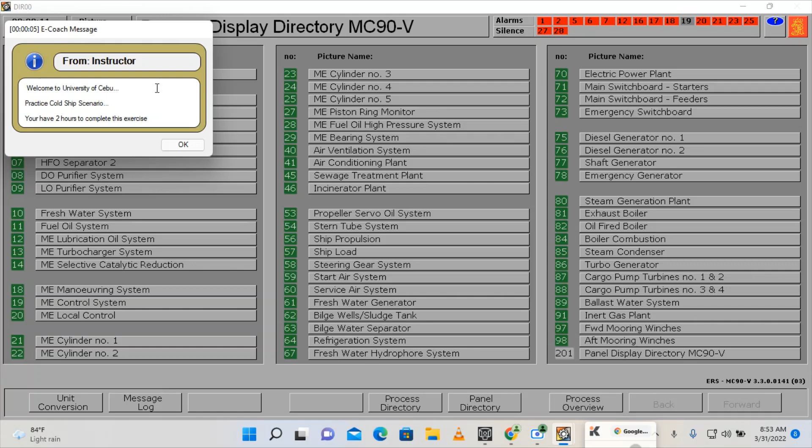Press Shift F1. Now it's running. Welcome to University of Cebu. Practice cold ship scenario. You have 2 hours to complete this exercise. So by the way guys, we have here an alarm, so just acknowledge.

Let's go to the emergency generator first. Make sure that we have enough hydraulic pressure here. This is enough. So our emergency generator is now ready to start.

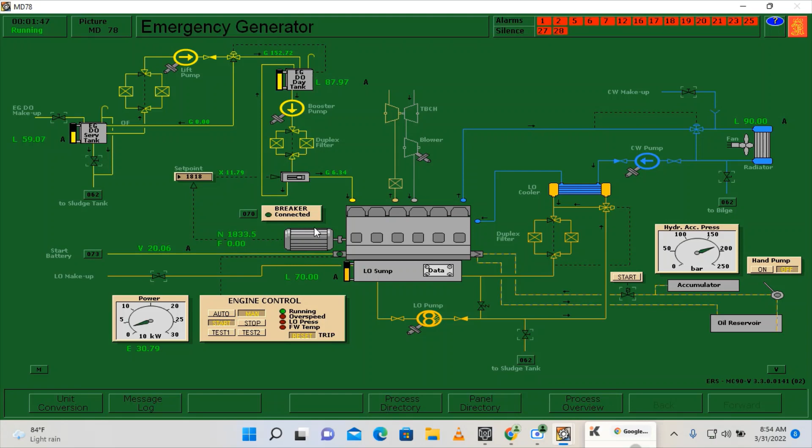Now it's running. Voltage control on, put it in auto. Let's wait until this one will connect. Now connected to the emergency bus bar. Let's put every equipment on the emergency switchboard in.

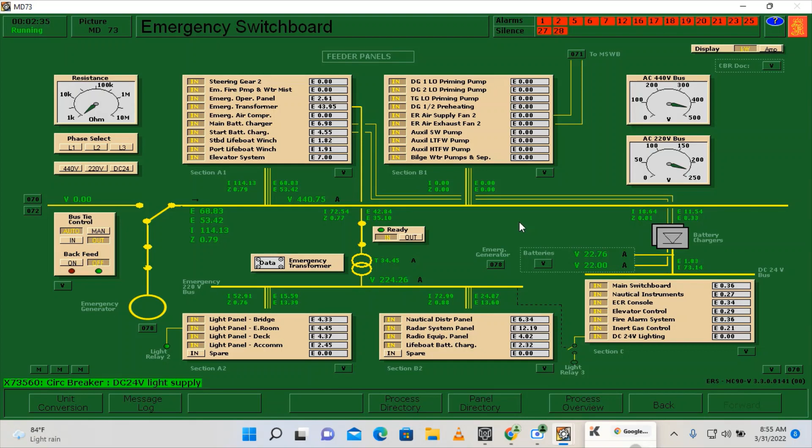So later on we are going to start generator number 1 and 2. So let's prepare as well the main switchboard. Switch all the equipment in.

We're done here. Let's prepare DG1 and DG2. I'll start it afterwards. We can open as well here the steam and all the related valves. So we're going to use diesel oil for the starting of DG1 and DG2.

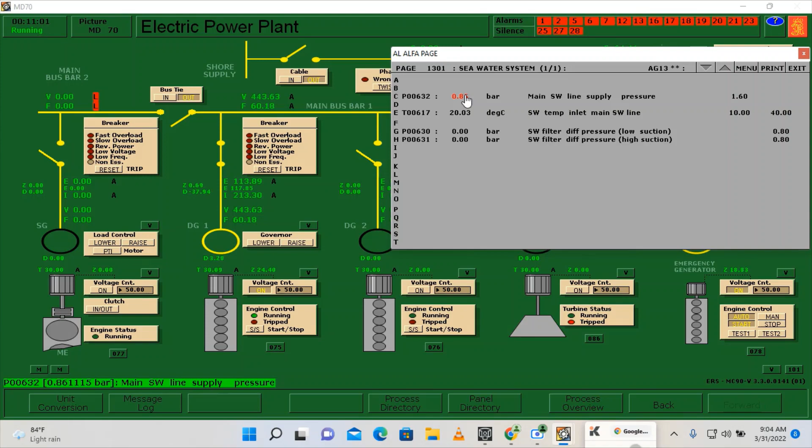Seawater system. Go. Low pressure, start main seawater pump and put it in remote.

Okay. DG2, let's start.

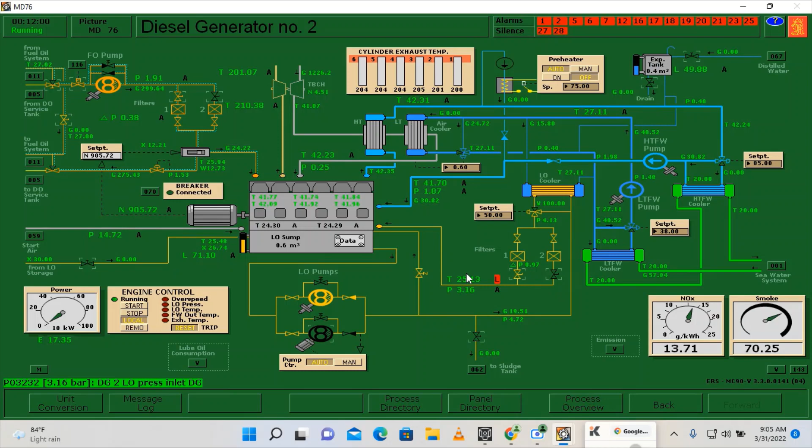HT of DG2, this one will be normalized. Same for this lube oil temperature, this will be normalized later on since it is already running. Put in remote.

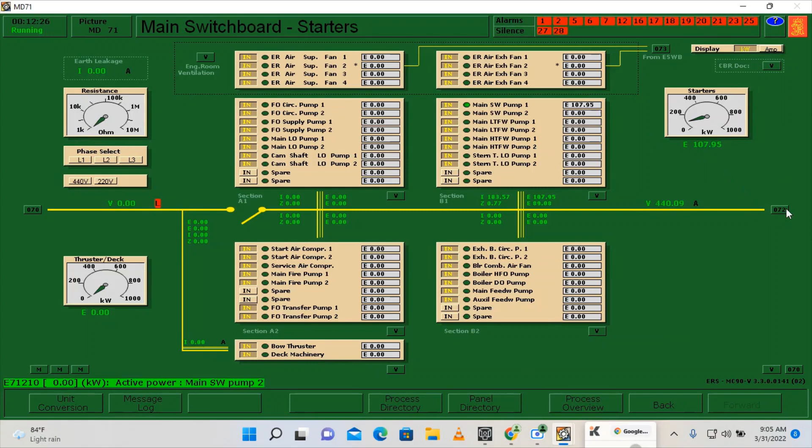DG2 connected. Make sure this one is in. Okay. Just acknowledge, this one is related to the main engine.

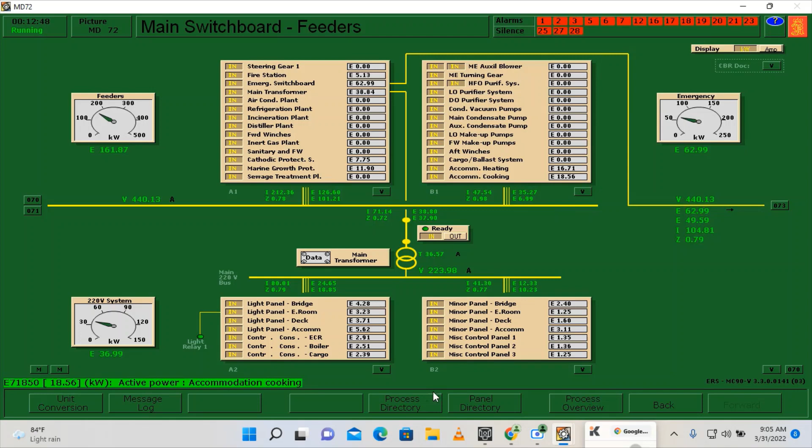DG1 and DG2 is now running. This will be normalized later. Acknowledge.

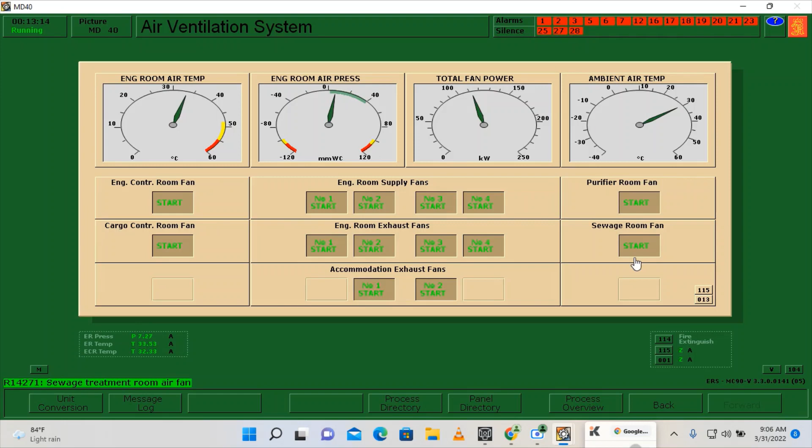We need to make sure that our fans are running. Switch it on.

Now let's set up our starting air system. So I only open starting air bottle number 1. We will make starting air bottle number 2 as a reserve, so I'm just keeping it closed.

Top it up. Let's double check the lines. Okay.

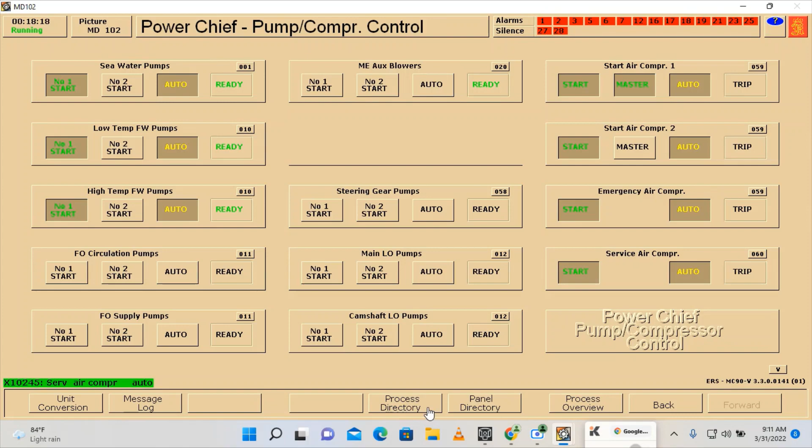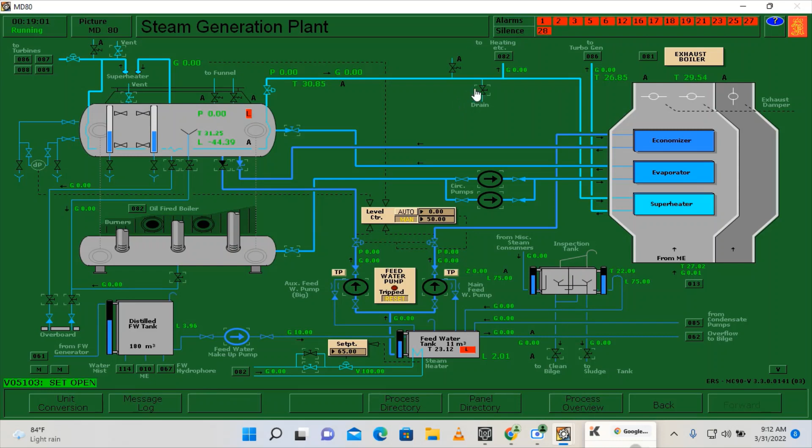Let's proceed to the boiler. Set up the valves. Page down. Zero. Auto.

So we have already opened the diesel oil from our tank going to the boiler. So we can start our diesel oil pump. As you can see, our boiler is still not running, but this one is having a relief valve, so it will just go back to its system. You can run it.

So we still don't have steam, we cannot use this one. We need to use atomizing air since we have already air. So just change over. You can open this one as well, and we can set up this steam heating going to our HFO. Switch it on DO. Make sure there's no active alarms here.

So a while ago it was at low atomizing pressure, but now we have already enough, 5 bars. 7, 10, 10, red. So let's do a purging process on our boiler.

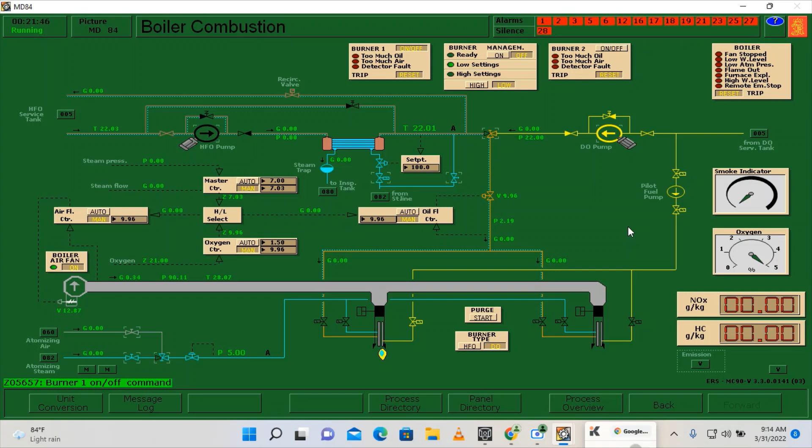Purging is now finished. Put it back to 10, and let's start our burner number 1. Burner number 1 is now firing, so we can put it on automatic.

We can start as well burner number 2, so that we can heat up faster our water on our boiler. Better to use 2.

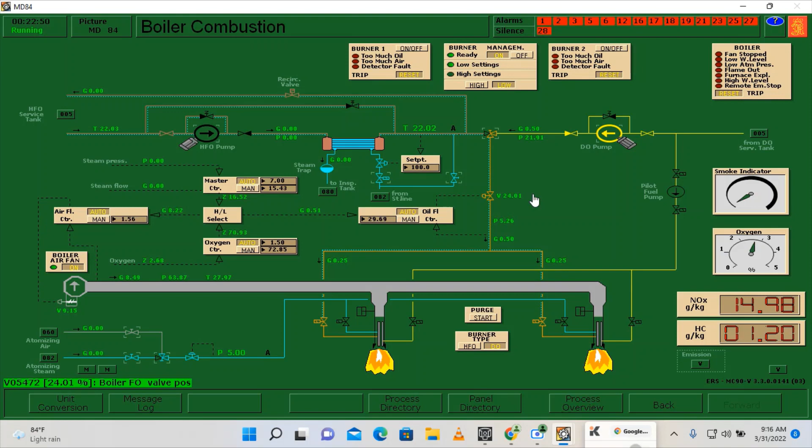Once ready, you can put the burner management on. This will automatically control the burners depending on the steam pressure. Go here on the oil-fired boiler. Let's warm it up a little bit.

Let's close the vent.

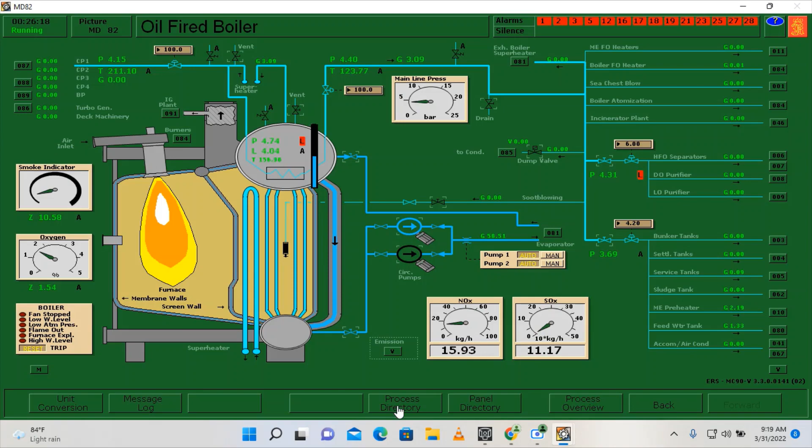Let's slowly open this steam shutoff valve. It's now fully open. So run this feed water pump.

Once this level is indicating 0, we should be able to put 0 also here. Okay, 0, and put it on automatic. So you can close this one. By the way, we already have enough pressure here, so we're all good.

I'm going to make sure that the steam going to our bunker tanks is open, so I'm going to make it 100% open. Okay, page down, settling tanks. Open.

By the way, in order to heat up faster our HFO settling tank, what we can do is run our purifier feed pump. Just open this one.

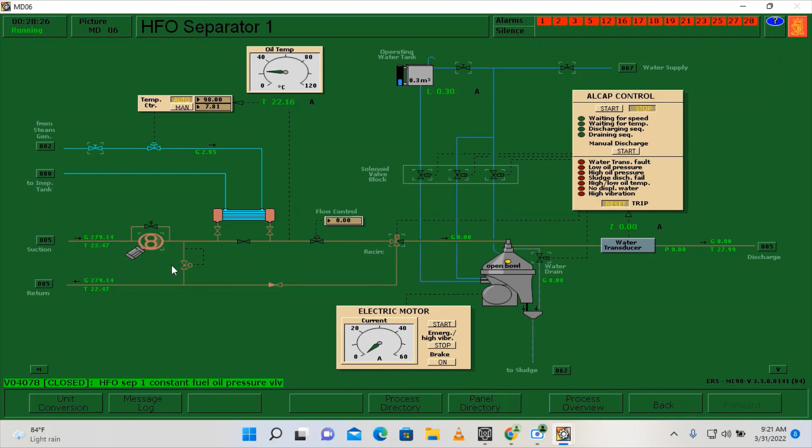Maybe going here. Here, where's here? Open the steam, put it in automatic, and start your feed pump. This one is for the HFO separator, but I'm doing this in order to heat up faster our settling tanks. It will just do a recirculation.

Service tanks, we have already opened this one a while ago. Now let's proceed here on the refrigeration system.

Make sure that there are no active alarms here, then start. So you can see I've started it at 10. I'm manually adjusting this; later on I will increase this one gradually.

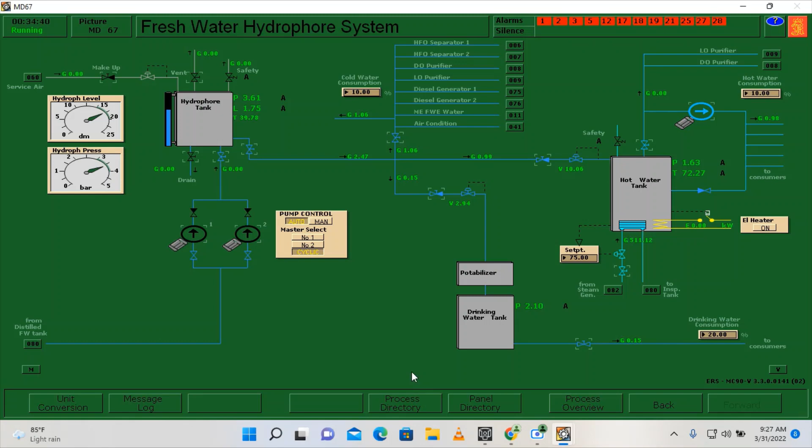The next thing that we need to do is prepare for our departure. So we need to check first here on the stern tube. We have low level alarms, so we need to top it up.

Let's start here on the high... this is enough, change it over.

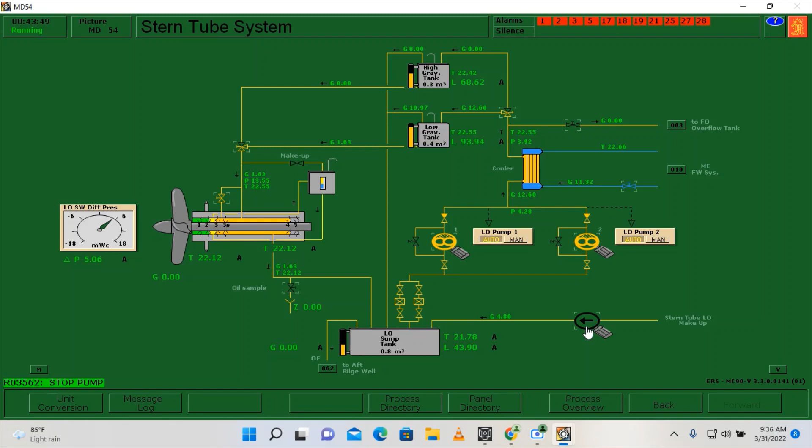Okay, so this one should be enough. We're going to top up if there will be an alarm. I'm going to stop, and let's proceed here on the steering gear system.

The steering gear system, we also have low level alarms here. So open it, top it up.

I'm going to run first this pump number 1. So what we are going to do is we need to check steering gear pump number 1 and steering gear pump number 2 for both hard port and hard starboard. This is already a preparation for the departure.

By the way, if you haven't seen the previous video, please watch it as well. That one was the preparation of the main engine for departure. It's almost the same process, or you can watch that one.

This is enough. Put it local, run it, and we need to check hard port, hard starboard.

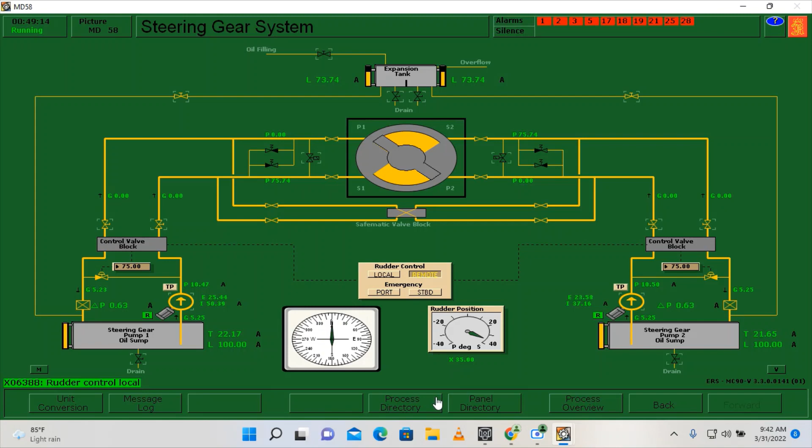Okay, we're all good here, and we need to prepare our main engine systems. We have already prepared this freshwater system. Page down, line up the valves for the fuel. So this one is diesel oil. I will not use steam heating.

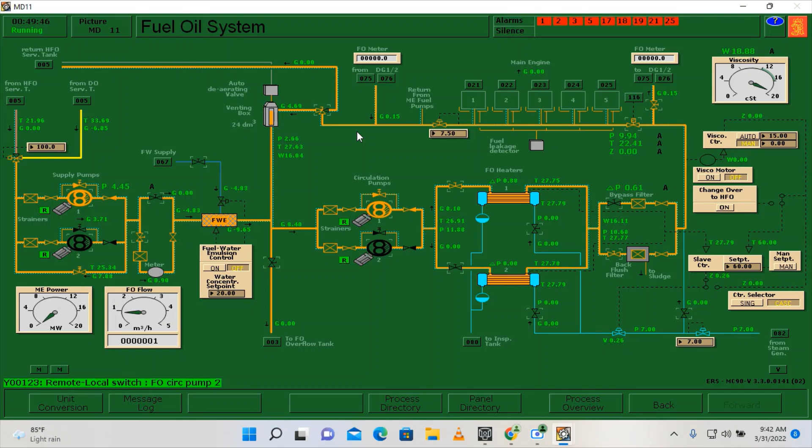Okay, start. Page down, top up.

As you can see, we have low level alarms here on our cam LO tank. We need to top up by opening this valve while the pumps are running. So let's line up the valves. Okay, we're all set. Just acknowledge the alarm.

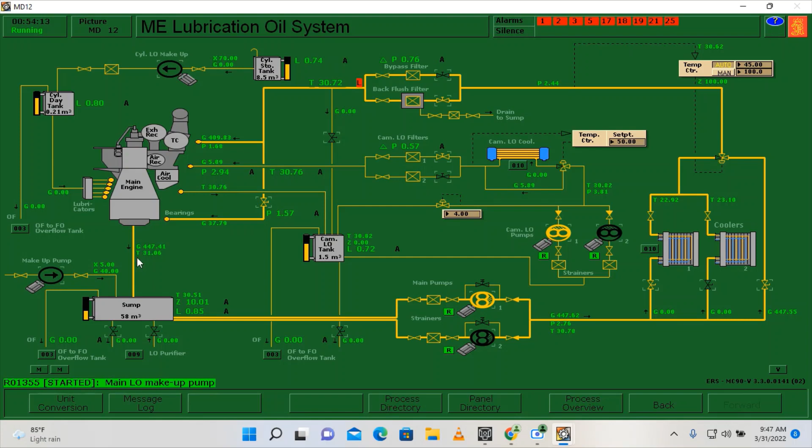Here, make sure that it is on remote. Engage the turning gear. And make sure that all the indicator cocks are open.

Pump control, make sure everything is on auto. Let's go here on the bridge control. Make sure that we are on standby.

So now we are going to test the telegraph. There should be an alarm, lever mismatch also here. We'll start here on the bridge control. So, 20, dead slow, page up. So there should be an alarm here.

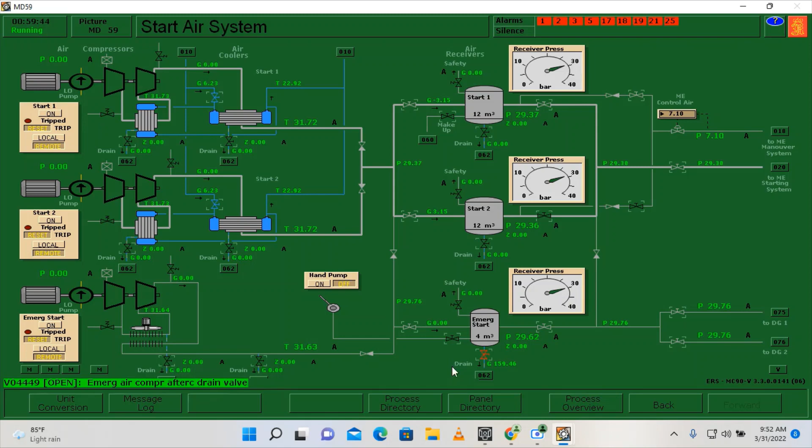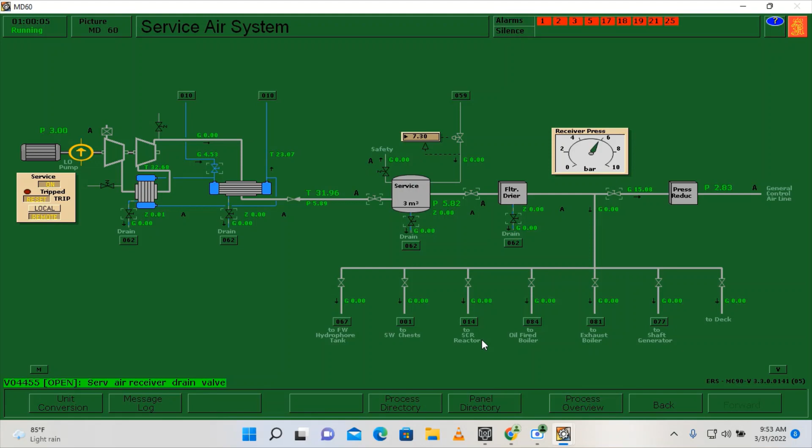Page down. Okay, now we have already drained the water on both starting air system and service air system. We can now disengage our turning gear.

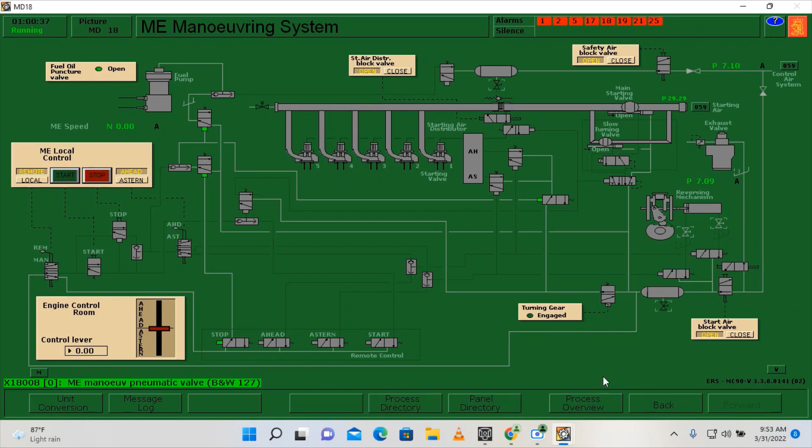Make sure that the governor is on remote, same also here. And you can open this air blocks, make sure all are open. And let's go here on the main engine control.

And let's do a slow turn. So this one is a blow through. Make sure that your indicator cocks are open, which we have already opened. So do a slow turn, a quick one, then close.

Okay, now we need to secure the indicator cocks. We need to close them. Now we have our main engine ready.

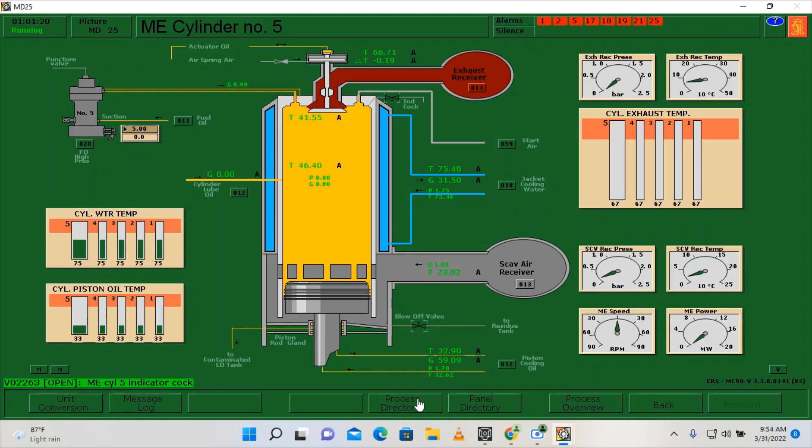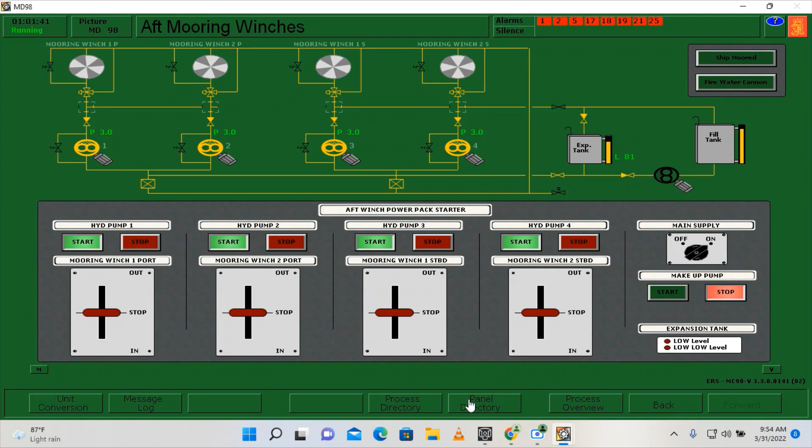So let's clear our lines from the port. So click this Ship Moored, meaning that our lines are already free, and go here on the main engine control, transfer the responsibility to the bridge.

So now the bridge is now in control of our main engine. So I think we are already ready for the departure. I'm going to put 40, and there should be an actual RPM here. Our main engine is now running. Our ship is now running, actually.

So let's not stay there for a longer time, since it is a critical speed. Okay. I'll go back, our ship is already moving. We're already sailing.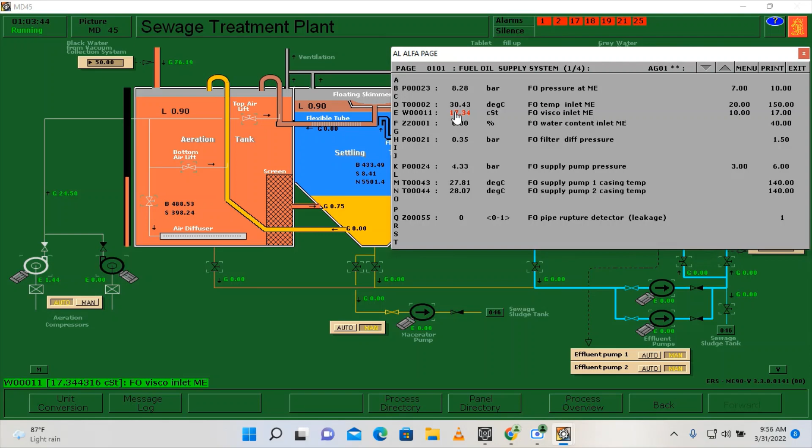And with that, while we are still there, we can go back here on the sewage treatment plant and operate this one. So as you can see, we have already our air valves open. You can start it and put it in automatic. Put it back to 50. Just acknowledge this one. Open this. Okay. So as what you can see, our sewage treatment plant now is on operation.

Let's go on the freshwater generator. Let's set up the line. So make sure that our pressure, the vacuum here on the freshwater generator, should reach around 0.1 bars. So while waiting, we can check this. Okay.

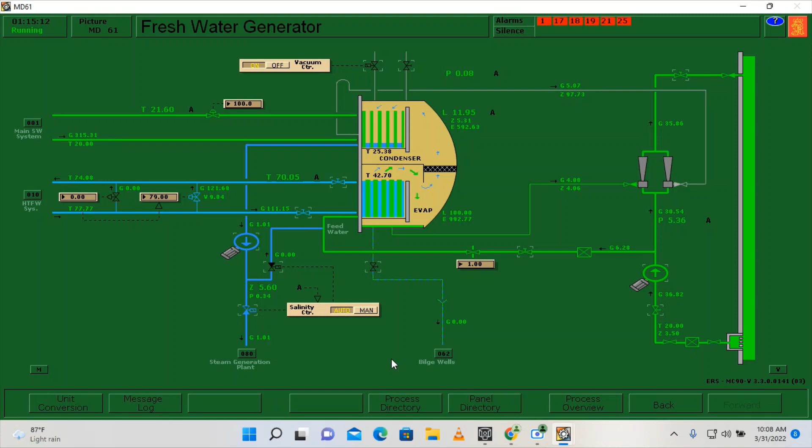Okay, so I think we are done here. The next thing that we are going to operate is this bilge water separator. So to start, I need to line up the valves. We are going to use this seawater later when doing the flushing. Heat it up.

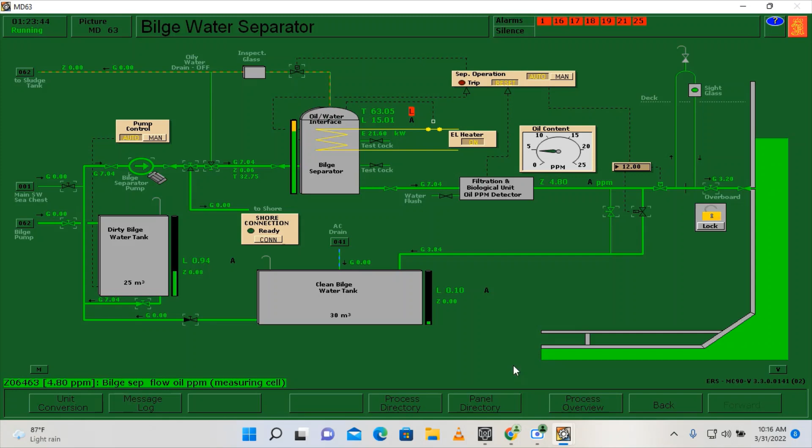So let's just check here on the forward mooring winches. Since we are already at sea, we can stop. Also the aft mooring winches, you can stop it.

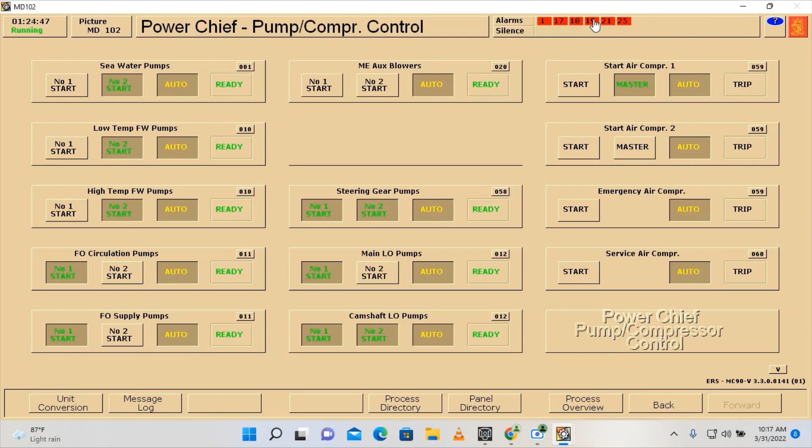So the remaining alarms here are already temperatures with the tanks, as well as with the bilge water separator. So we have here main bus bar 2 voltage and frequency.

So here, since our main engine is already running and we are already at sea, we can try to operate this shaft generator and this turbine generator. Since this is the number one priority, we can start this one first. Go here. I'm going to make sure that the lube oil is at normal level.

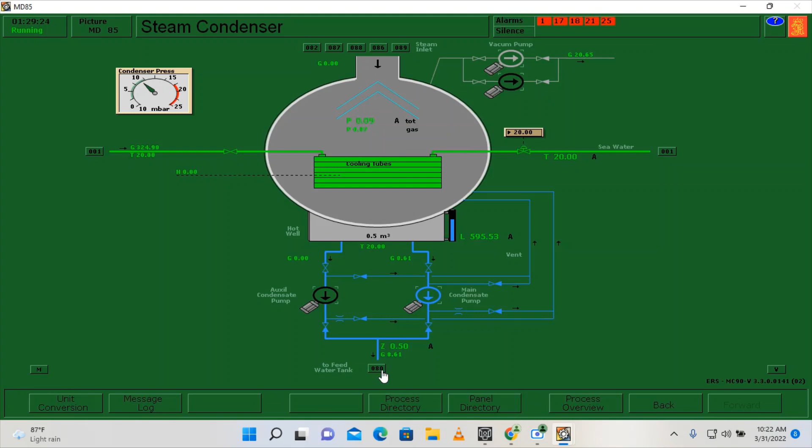Okay, so this is already normalized. We can go to the turbo generator, reset the trip, and let's turn it.

Okay, so that should be enough. Disengage the turning gear. Reset. Okay. So now we are ready.

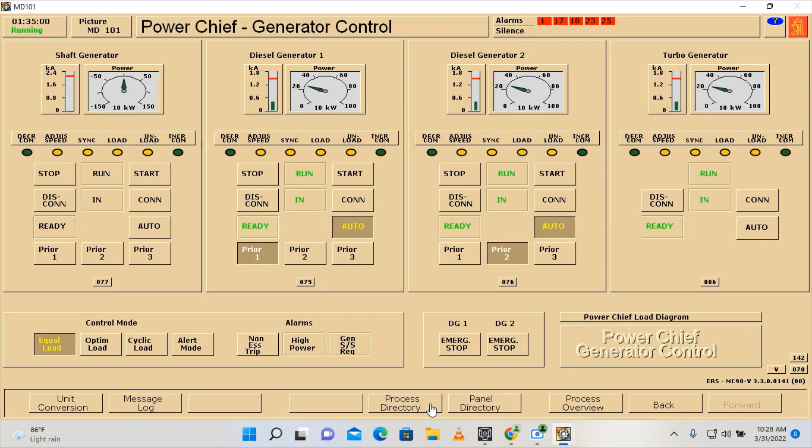Let's check. Okay. Now we're already running our turbine generator. So the next thing that we are going to run is this shaft generator. So let's go here.

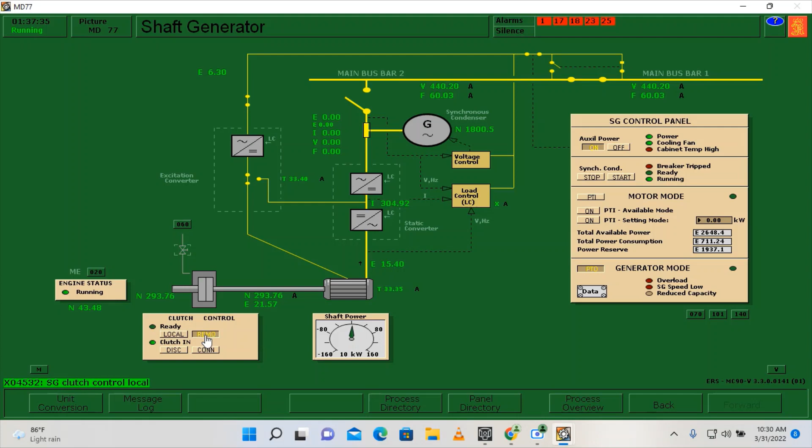So you can see it is now trying to connect our generator. It's now connected. The clutch is already in. Put it in remote. And let's go here on the electric power plant. Voltage controller on.

So let's try if we can use this semi-auto. Okay, I think it's not. So better we're going to use this manual synchroscope.

Go here on the manual, panel directory, shaft generator, and click this synchroscope, turbine generator. We're going to synchronize it using this one, and as what you can see, we need to increase the shaft generator rather, so my mistake. We are going to use shaft generator, so choose this shaft generator.

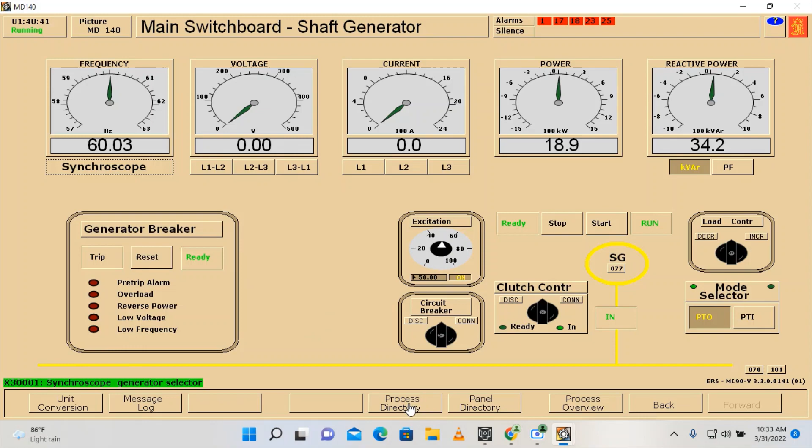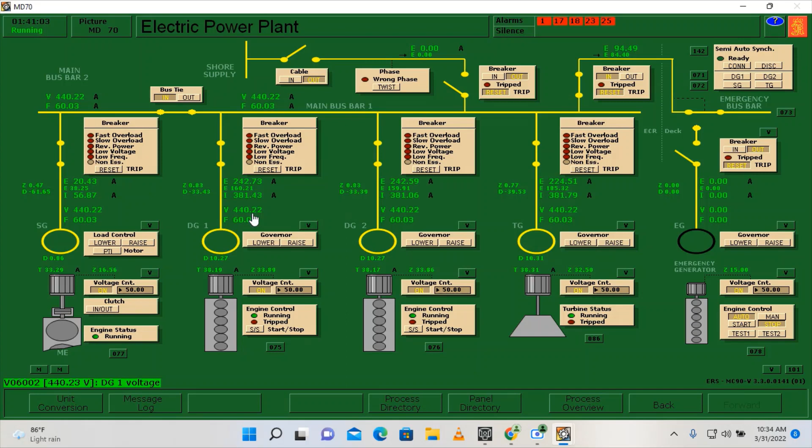Now you can see that our shaft generator is already connected to the main bus bar. So as what you can see, all generators are running. So we need to change the priority of this one. We'll make shaft generator priority number 1, priority number 2 will be DG1, then DG2 last.

So priority number 1, number 2, priority number 3. Put this one in auto.

And slowly it will transfer the load going to the shaft generator. And since this is the last priority, then this one will be automatically disconnected. Same also with DG1, because shaft generator and turbo generator can already supply the demand for electricity.

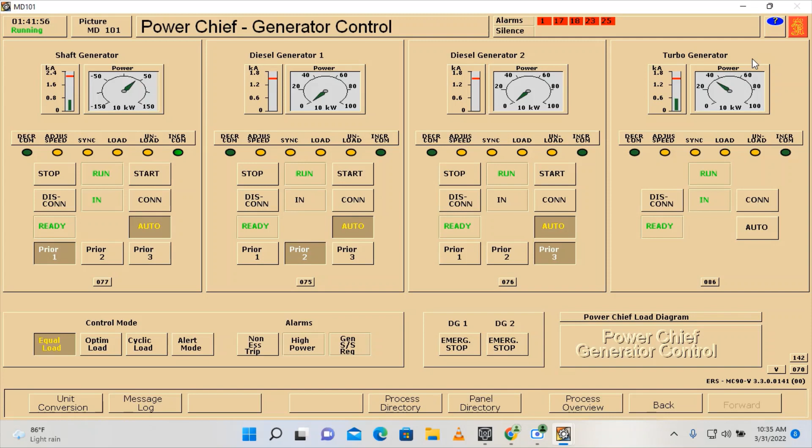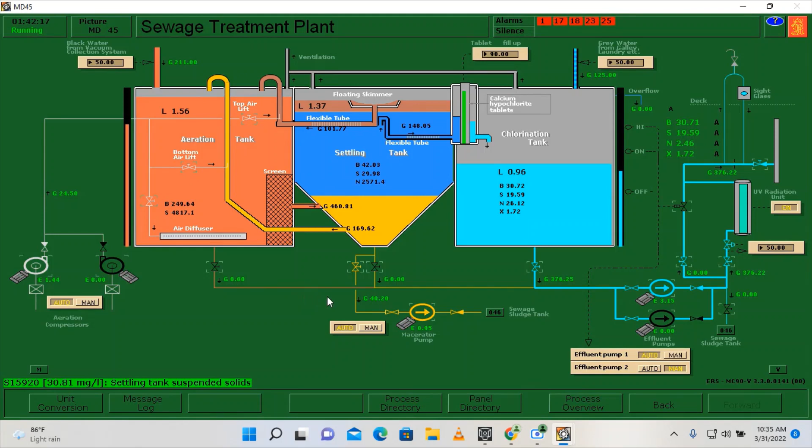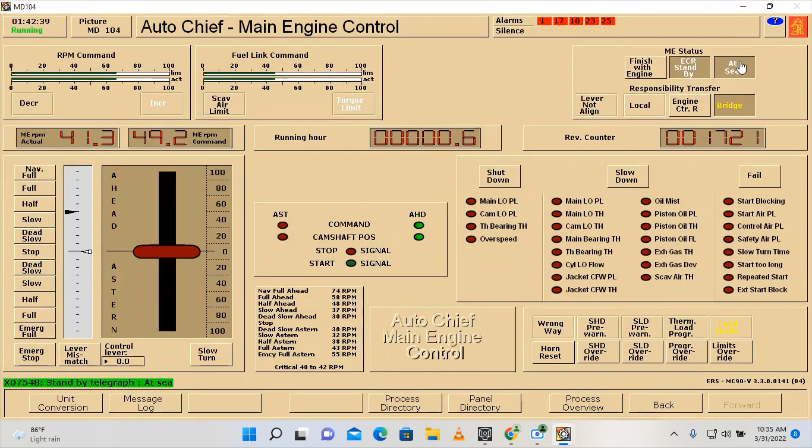And since we are already at sea, make sure that... okay. So as what you can see, guys, we still have a high temperature alarm, I mean low temperature alarm on our bunker tanks.

We already have enough temperature on our HFO settling tanks, I mean service tanks, and the HFO settling tank is still low, it's still indicating low.

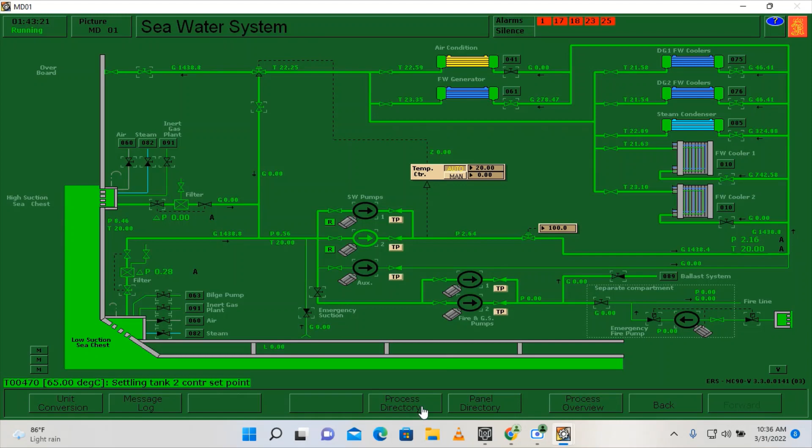So I think that's it, class. So for the remaining time, at 2 hours, do not exit your exercise, do not exit it. It's not enough, you will just fail. So it's better to keep your simulator running.

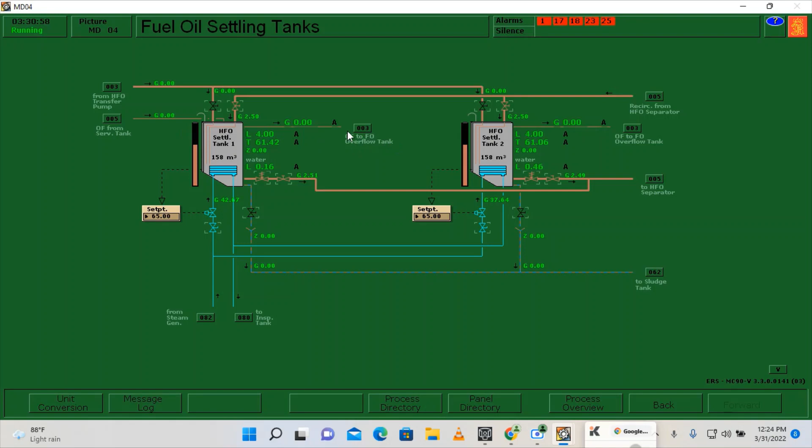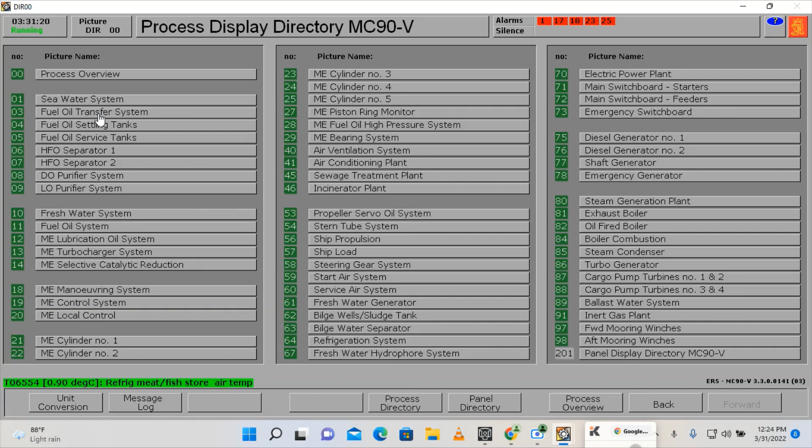So after 3 hours, you can see that our fuel oil settling tank is already at normal temperature. But the only remaining thing here is the bunker tanks, which is still around 38 degrees Celsius, and same also with the refrigeration system. So if these two are the only ones remaining, the bunker tanks as well as the refrigeration system, what we can do is we can just manipulate.

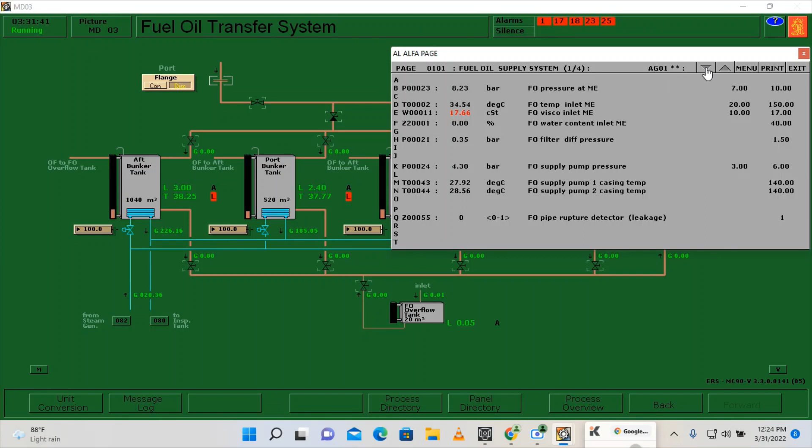Since we cannot wait that long on this simulation, what I'm going to do is click this one, and down here you can see our bunker tanks, and I'm going to edit this one. So as if we have already waited, I'm going to put 45, 45, 45, so 45.

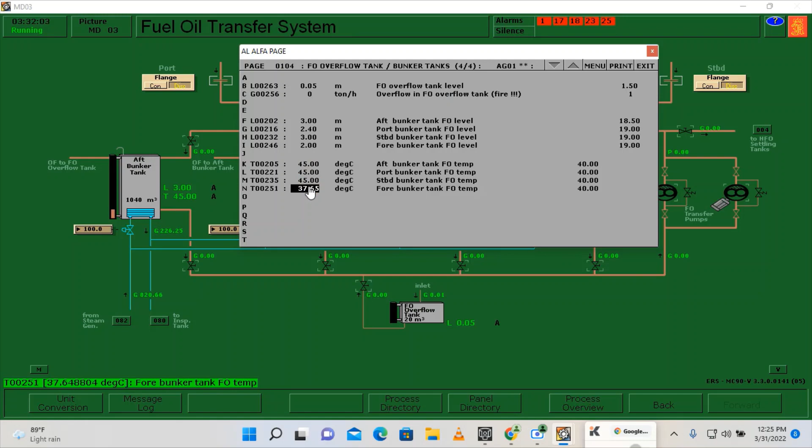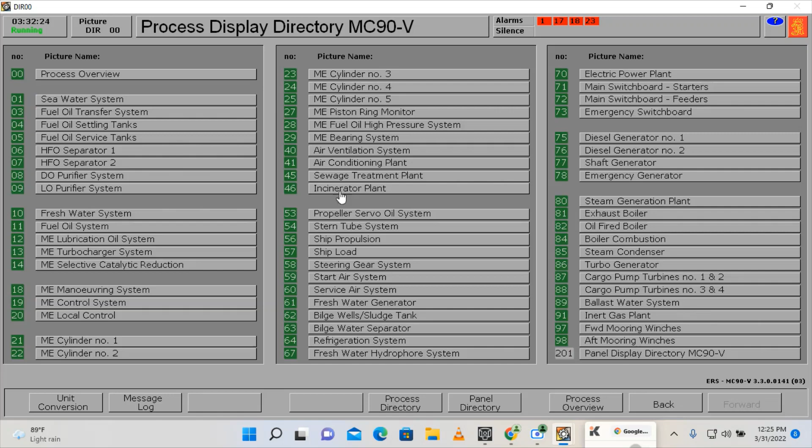Let's just wait for a few seconds, and then we can now exit our simulation. So to exit the simulation, you just need to press Shift F3. You really want to exit? Yes.